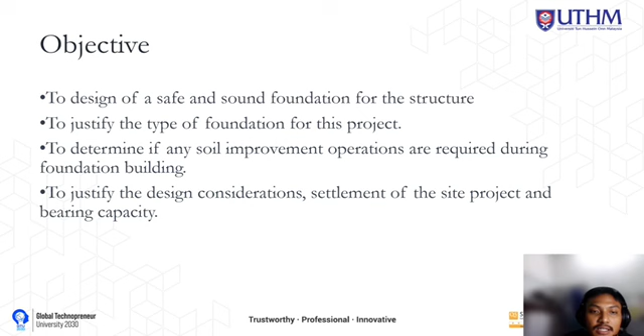Aquas Geoconsults and Environment, our company, has been asked to conduct an examination on the land to determine whether it is suitable for construction of a one-story house. This project is in Hulu Langat area of Selangor, Malaysia. An investigation of the site was carried out to collect geotechnical engineering data concerning the area beneath the site. This data is used to provide information for the design, evaluation, and subsequent construction of the proposed structural foundation. Our objective is to design a safe and sound foundation for the structure, to justify the type of foundation for this project, to determine if any soil improvement operations are required during foundation building, and to justify the design considerations, settlement of the site project, and bearing capacity.

For site location, the project is in Hulu Langat, in Beranang, Selangor Darul Ehsan. The diagram below depicts the construction project being proposed. The city of Beranang can be found 35 kilometers south of Kuala Lumpur, 13 kilometers south of Kajang, and 30 kilometers north of Seremban. About 3,000 people call this place home. It can be found on the boundary between the states of Selangor and Negeri Sembilan.

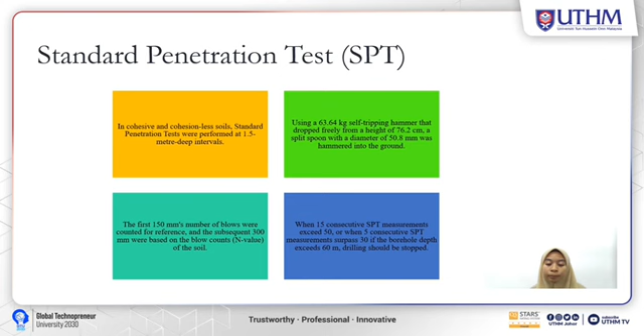In this project, standard penetration tests were performed at 1.5 meter depth intervals using a 63.64 kg self-tripping hammer that dropped freely from a height of 76.2 cm. A split spoon with a diameter of 50.8 mm was hammered into the ground. The first 150 mm's number of blows were counted for reference, and the subsequent 300 mm were based on the blow counts of the soil strata that were met, which show the relative density of non-cohesive soil and consistency of cohesive soil. When consecutive SPT measurements exceed certain thresholds, or if the borehole depth exceeds 60 meters, drilling should be stopped. This is the result of the standard penetration test of the borehole.

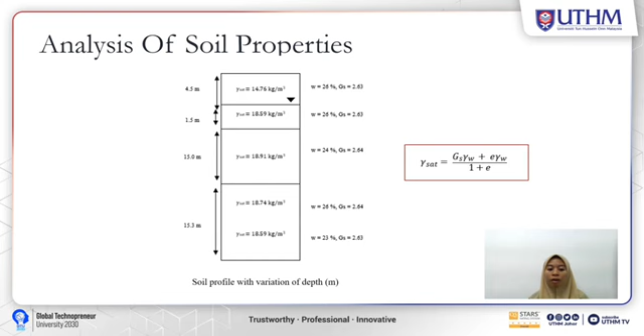From the soil properties that we obtained from the bore log, this is the soil profile of the borehole. By using suitable software and the structural drawing we propose, this is the load of every column that we will use for the design of the foundation. The minimum load is from column 1, which is 85 kN, while the maximum load is from column 12, which is 258 kN.

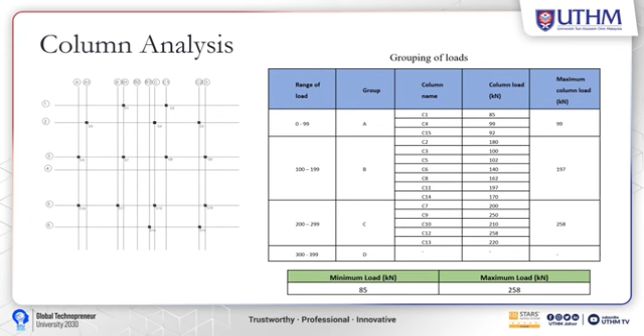In our project, we use the Meyerhof approach to design the shallow foundation. The design factor of safety that we use is 3. The allowable load for each group is calculated using the specified value for depth of foundation, the maximum load, and the area of foundation. There are 3 groups of columns, and the allowable load is computed and compared to the total load using the Meyerhof approach to see if the shallow foundation can carry the load or not.

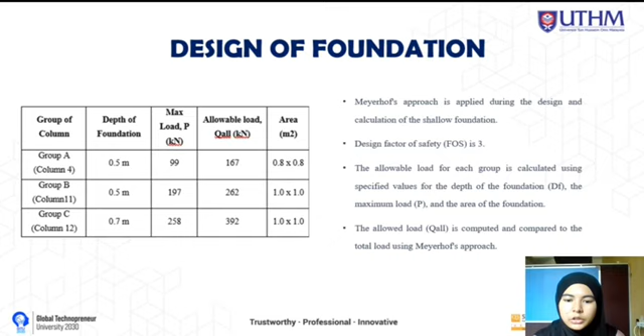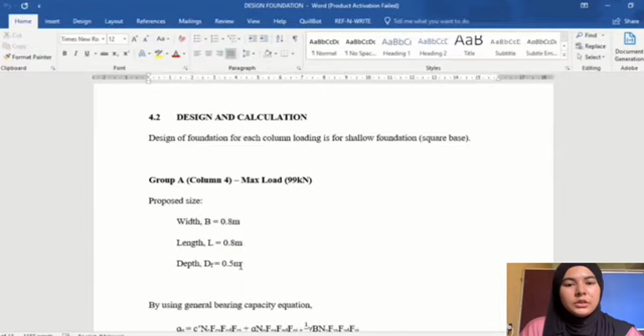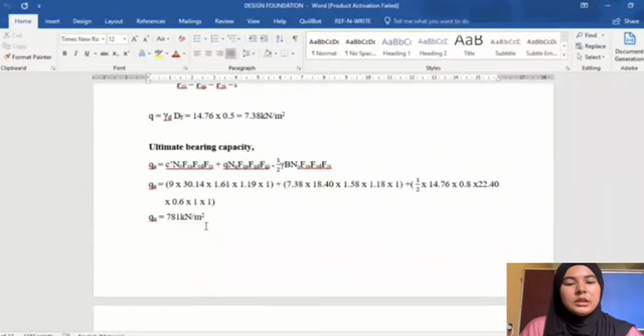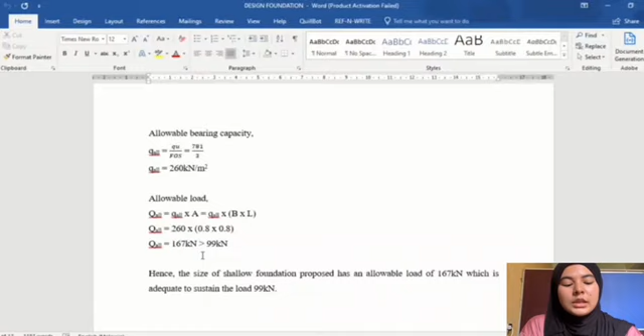This is one example for calculation of shallow foundation. The maximum load for Group A is 99 kN. So our group has proposed a size of 0.8 meter by 0.8 meter by 0.5 meter. By using the Meyerhof equation of bearing capacity, we need to calculate the shape factor, depth factor, and incline factor. After we calculate the factor, we can get the ultimate bearing capacity as 781 kN per meter square. Then to get the allowable bearing capacity, the ultimate bearing capacity is divided by the factor of safety, so we get 260 kN per meter square. Lastly, to get the allowable load, we multiply the allowable bearing capacity with the area of foundation. Hence, the size of shallow foundation proposed has an allowable load of 167 kN, which is adequate to sustain the maximum load for Group A.